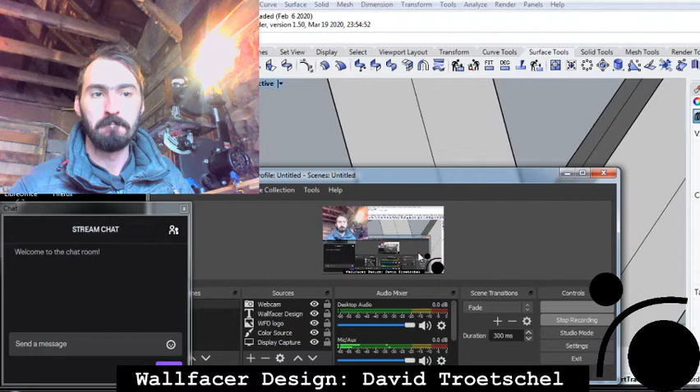Alright, well this is day two. This is the composite frame bike building project. My name is David Troetschel with Wallfacer Design. We're going to start calling this Wallfacer Bikes, something along that line.

Today's going to be a little bit weird for weather reasons. It's really cold here, so I'm working in the shop, but I might not be able to stand it for that long, to be honest. The idea today is to do the rear half of the frame. Yesterday we finished essentially all of this region, minus the head tube, which we'll buy, and we also finished the seat section as well.

What we need to do today is these back rear triangles. They're a little more complicated because they have angles built into them, but we already have these long sections cut. Those were done yesterday, so if you missed that video, they're up on YouTube and also on the Hackaday page. It should be fairly straightforward, but the junctions where this meets with the seat tube and the rest of the frame will get a little complicated.

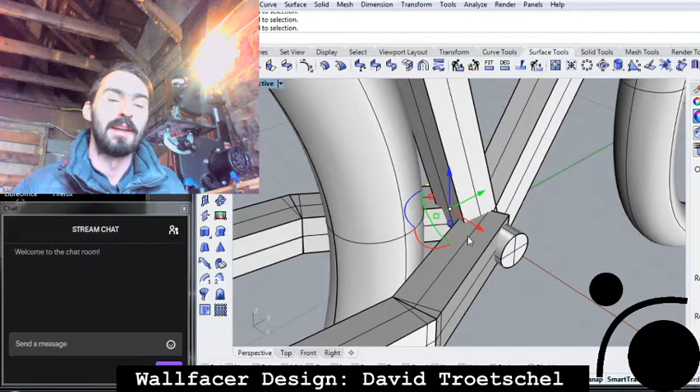Good thing is we don't really need to worry about this bottom bracket too - it's just kind of there as a simulation right now. That's probably going to be up a little bit, or we're probably going to be building something in this region. I also have questions about where the sprocket's going to go and whether we should be doing a drop chainstay for this side - I've seen that as a common thing. So we have some flexibility here.

I made some notes in the Hackaday page about it, but right now this is all based in the inch system, which is not a good idea in almost any case. It's very imprecise, and they just don't make that many rulers that work in tenths or decimal divisions of inches. So 10.1 inches is pretty hard to do through a fractional system - you need a specialized ruler for that. Either way, there are some serious errors in the frame already that I noticed, and it's because I was using inches for the system.

Part of that was because of the boundaries I built in. There are certain angles that only make sense for bicycles that you can't really go in or out of. Things like the stack and reach limits are never going to be below a certain number, and never above a certain number for any typical frame set. So those constraints have already been built into the system, but to convert all that to metric, I have to change those upper and lower boundary limits. That's going to happen, but probably tomorrow, maybe this afternoon, depending on how I feel.

Since we're already about halfway done with the primary build of this frame, and we've learned a lot already, I'm just going to keep going, build this back, and then we're going to glue it together and see what it looks like, hopefully. That might be all done today, but probably with gluing it together, those photos will be uploaded later.

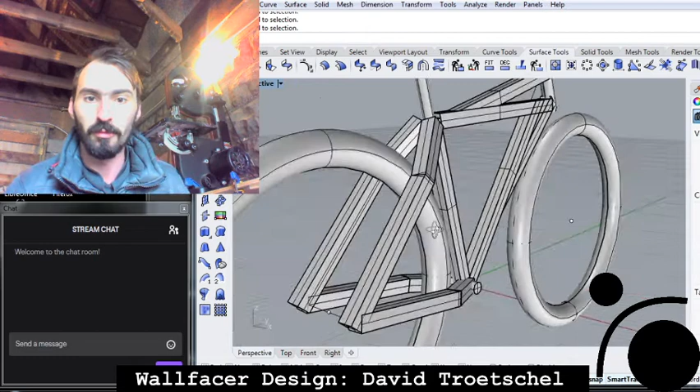So we'll just grab one of these members first. It's going to be a very similar process to yesterday, if people were there for that, or if they catch up later.

Let's see how we want to do this. We're going to measure from essentially this point to the end, and then we'll find the difference in that cut value. It looks like once we make that cut, we'll be able to flip the member and it'll transform into exactly the correct angle we want. But we'll double check the dimension when we get there. This should be really simple and straightforward, actually. So let's do it.

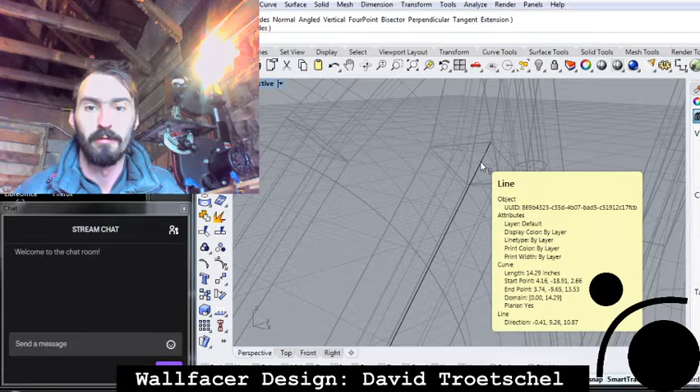We'll go with standard line, pull it to the end, and then we want to make sure we connect to the right place. We'll use a bubble to measure this - it's 14.29 inches. So I have the member stored back over here.

And that piece is still labeled from yesterday, so it's the top right triangle. Let's double check the dimension again. It was 14.29. Ruler.

Since the other side is going to be a mirror, once we get to that point, I'll just trace from this template and cut the other one as well. Like I said, this should go pretty quick.

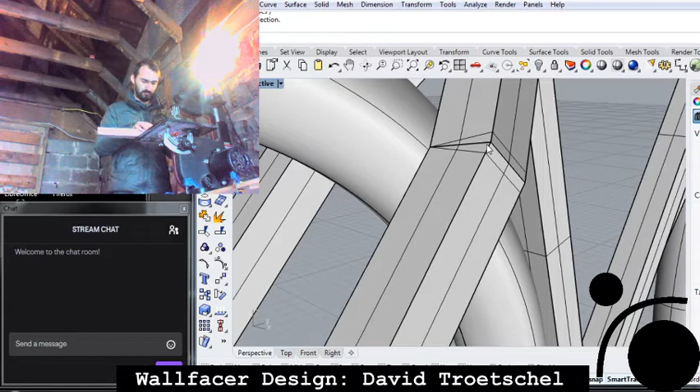So if you can see this, we went from this cut, and now we have a transformation here, which we'll measure and it should match up. So that's our nice convenient little bend right there. Let's figure out what that dimension is supposed to be for the longest edge, and then we'll double check.

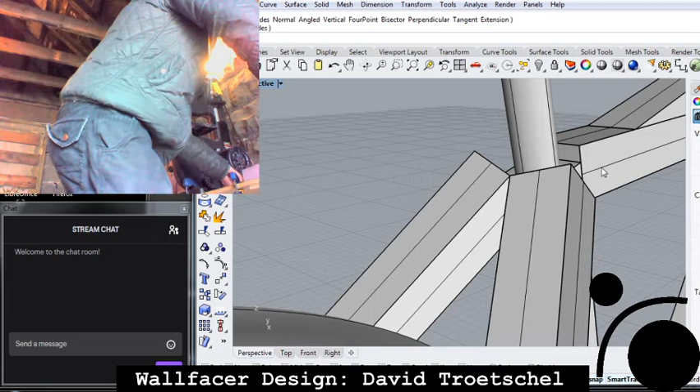Start of line. Alright, so that line is supposed to be 6.67 inches. Which it is not.

And it's probably because I cut the wrong member. Haha! So what we'll do is we'll cheat. Well, let's trace it. Yeah, so I actually cut the wrong member, so that's a little bit annoying, but hey, you can make mistakes once in a while.

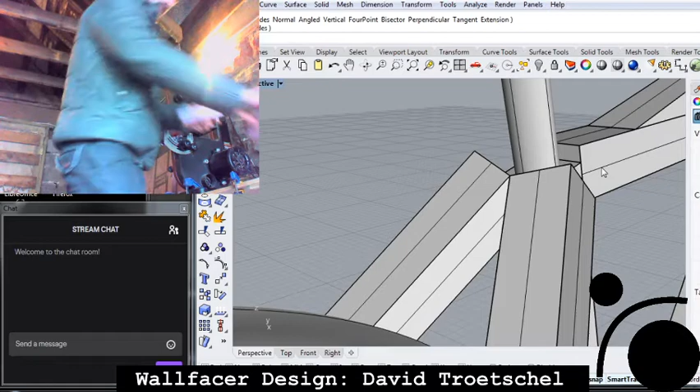So we'll just trace that dimension here. I'm pretty sure I thought it was supposed to be 6.67. So here's 6. That's actually still short, so it must be measuring from the center point, so it's not actually the outer dimension.

So that's interesting, but the way we can get around that is by actually tracing something like this. So I'll just take this to 6, and then say 67 -- now I'm actually using hundredths. Found all my rulers for that.

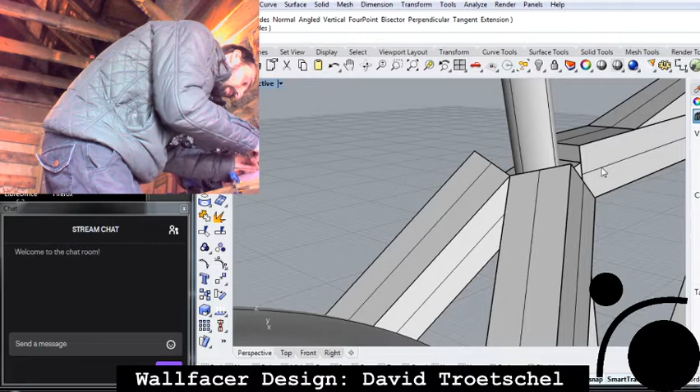And it looks like I'll be able to use the same piece of scrap for another piece as well. Or actually, what I think I'll do is, because I already have these two pieces cut, I'll start lopping it off of either a scrap piece, which I don't think I have anything long enough -- almost there -- or I'm just going to cut it off of the other scrap piece that was supposed to be the other top. Let's see. At least one longer piece that I could use, but I'm just going to start cutting this part.

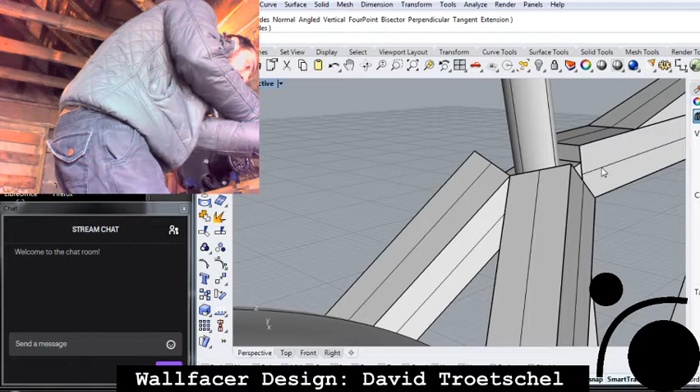We'll do 6. 7. Oh, that's actually backwards. Yeah, it should be like this. I'll measure. Six.

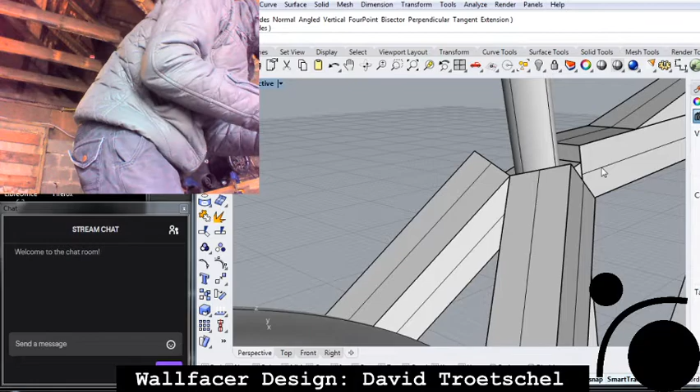Definitely a learning curve to this. But I can see how once the first couple frames are done and we have a working model, this is gonna go pretty quick. Because it's just gonna be a matter of copying these dimensions down and cutting where it's appropriate.

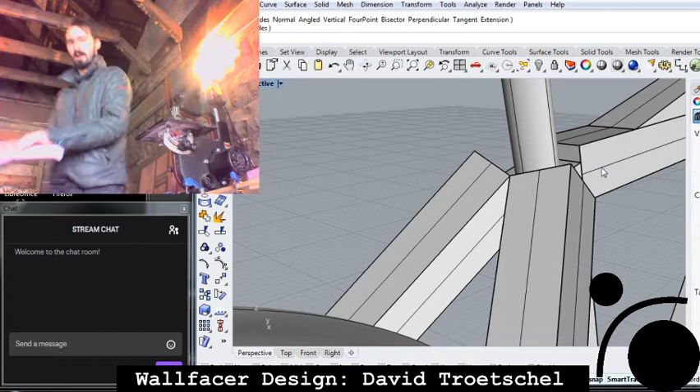Alright. So I'm going to lay these down on the ground and we'll be able to see essentially the top view. Give me one second here.

And at this point, I'm going to measure between the axles as well, so we can make sure. So this is actually the rear top of the triangle. I'm going to measure the axle width and then compare it to what I actually have dimensioned, just to make sure we're not messing something seriously up.

But so we just looked at effectively this view. It bows out slightly, but that's going to kind of correct itself, I think, as we start to cut the other components and then join it together. Just because of that joint.

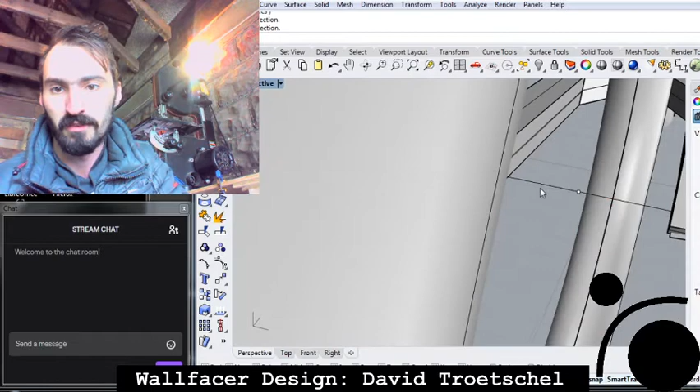So this curve here, how wide is that? That is 5.32 inches. We'll measure between. And that is close enough. Yeah, that's actually very close, which is extremely encouraging.

So I'm going to take a bite of my burrito, and I'm going to grab the other pieces to start cutting these.

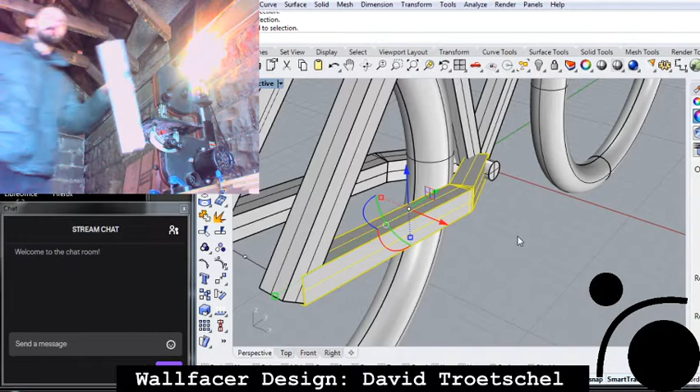So, 2 pieces. Let me see if my camera's messed up. No, it looks fine.

So for this one, let's grab one of these edges. Again, I'm expecting this to get messed up because of that weird tangent line length. So what I really need to do is find some way to measure the exterior length, and that's actually the true length of the member we're going to cut.

Also looks like I could have just added maybe an inch effectively, and that would add the extra travel distance, because it's really from there to there, from there to there, over.

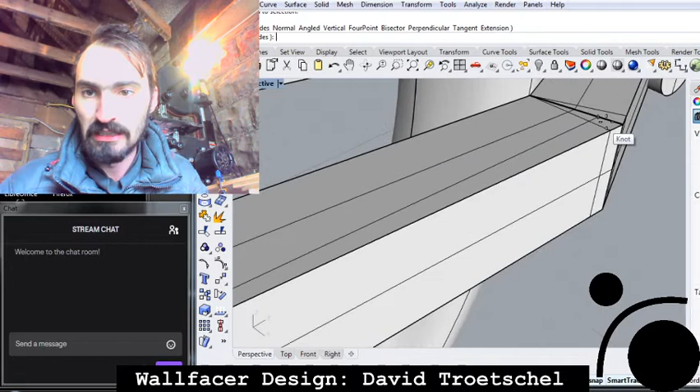Anyways, lessons learned. Let's see how long this is. So we'll go from here. That's 12.89, we'll just say 12.9. That's good enough.

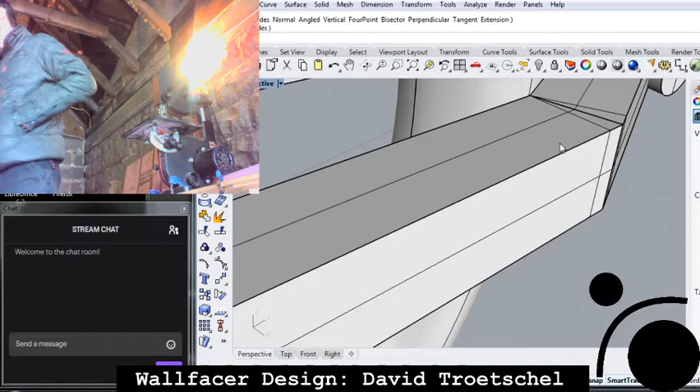Literally just misplaced my ruler. Where did I put it? Put it on somewhere. Just had it. I'm going crazy. Well, they'll probably turn up in a second or two.

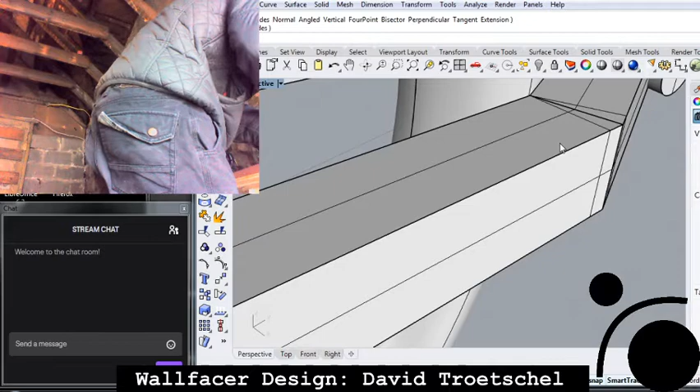When it's getting backed out a quarter.

So a pretty shallow angle, really. But once you add it up together, it's bigger.

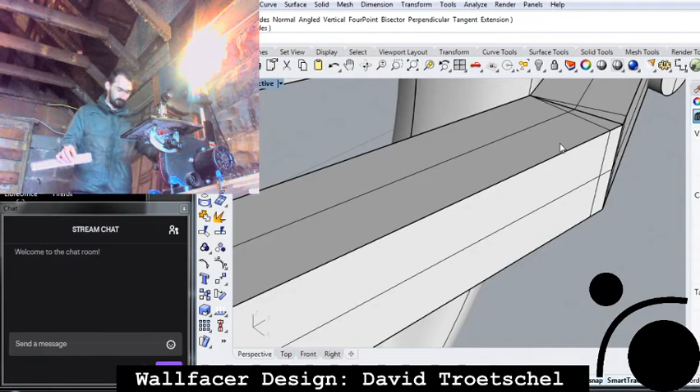Grab these scraps. Hopefully one will work.

And then the next piece is going to go from here to here. How long is that? 6.26.

Oh, too short. How about this? That's long enough. And I'm just going to call it 6 1/4.

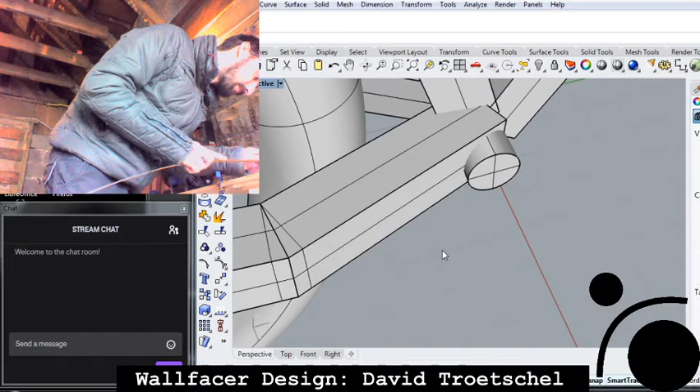Measure down. Do the angle. And then cut.

Another piece that'll work.

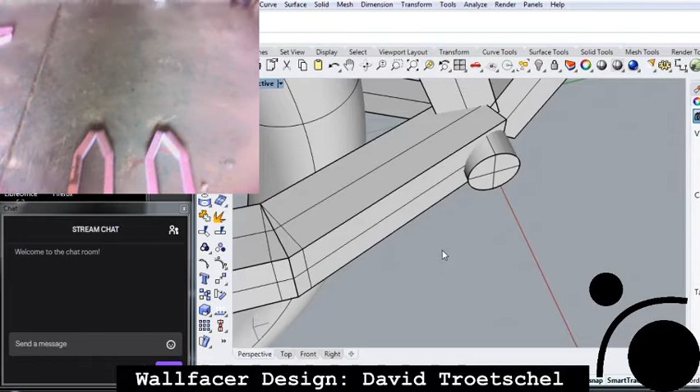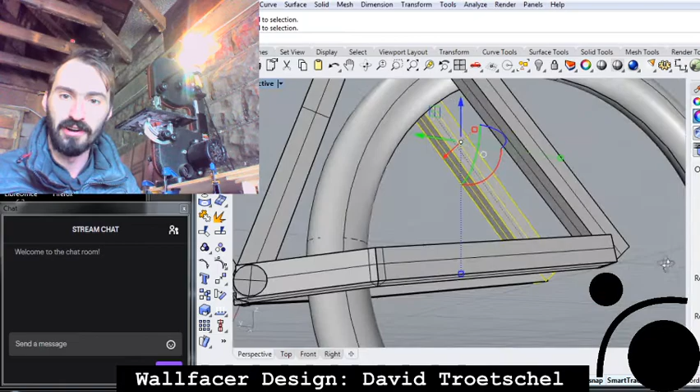So really it looks like what we should do—this is slightly off-centered in this rendering, and actually in the true model—but for the ease of just producing this initial frame, I'm just going to consider this cut like an actual blank cut all the way through, so with no overhang on the interior as would actually happen.

So we'll do a Boolean split, and then I'm going to pull out the angles, and we're just going to cut it from there, and we'll call it a day, because figuring out this joint is going to be way more challenging.

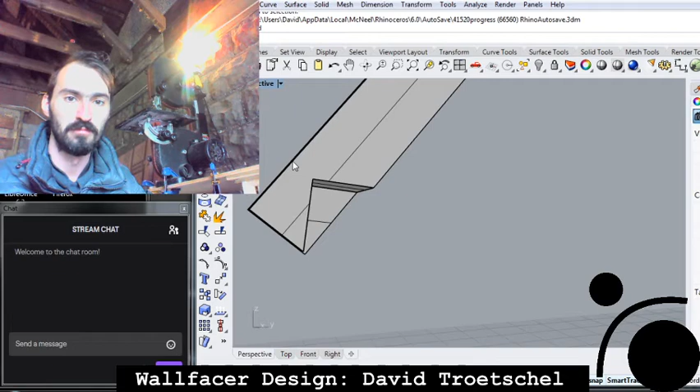So what this is telling me is from that top edge, I'm going to measure down, then a certain distance, draw that point, measure over, down. Yeah, that's how I'm going to do it.

So we'll do a couple lines here. We'll go, that. We're going to do another line that's going to be perpendicular to that. And then we're going to do another line that's perpendicular to here and measure over that distance. That should be able to give us all the information we need to cut this.

We're going to delete this for a minute and start examining. So it's going to be 1.26 down. So first of all, I got to grab my top piece.

In the correct orientation. And measure down 1.26.

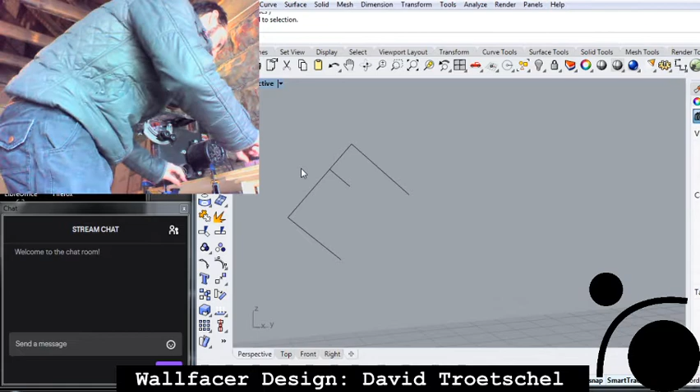Next dimension is going to be 1.18 over, and that's going to be 0.64.

And then we're going to measure down half, and all the way respectively.

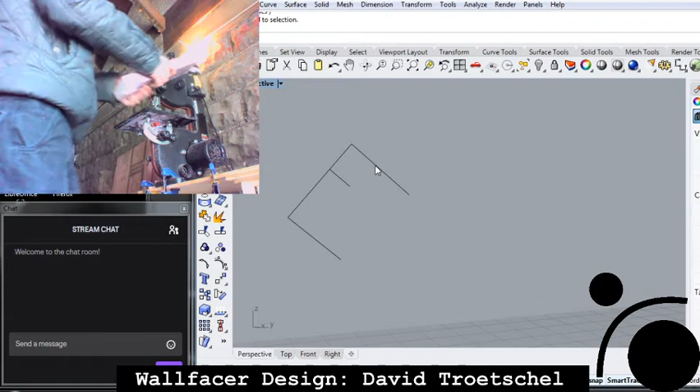So I'm just going to trace. Very precise, I know.

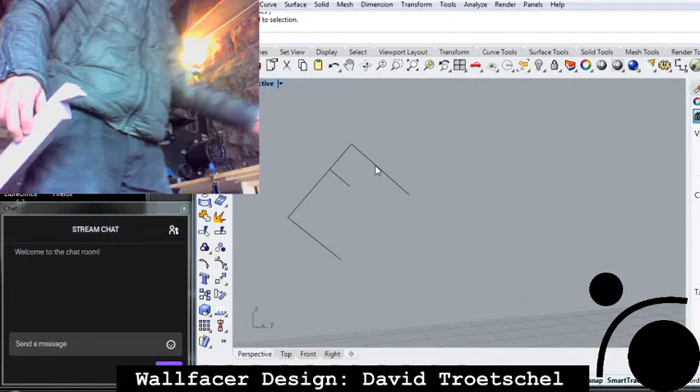And so, for 30 minutes, we've built the entire rear triangle. So what that means is so far, this frame—to actually cut all the primary members—has only taken 2.5 hours. This is the first time. That's pretty encouraging in my mind that this process can become more precise and faster over time to create ultimately a really awesome result.

So I'm just gonna line these suckers up so that we have an idea of what they look like, in a split second here.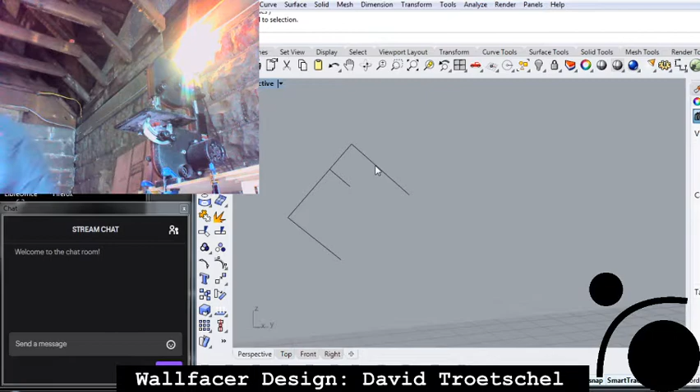Well, I at least got one of them to stand up, which is actually kind of a miracle. But there you go. That's what that angle was.

So that's that joint, and that allows us to start building that rear triangle. We just need to do a couple more cutouts. These ones are probably a little more complex. Maybe I'll have to cut these by hand, or with a chisel or something, or the razor blade. But yeah, I guess we'll start pulling it apart and figure that out. First things first, though, let's get this down.

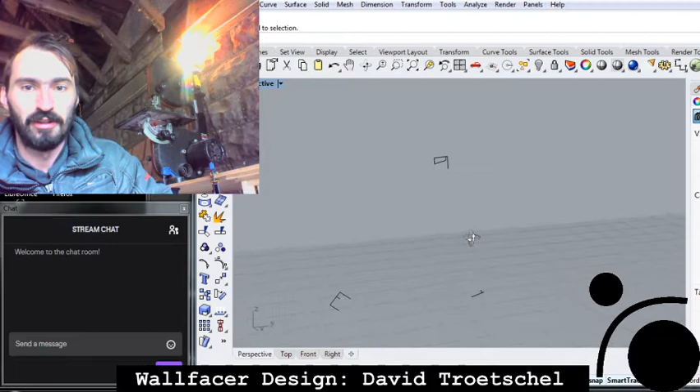So you can kind of see where all these floating angles that I've been measuring are in space.

Since we've already started on that top piece, I'm thinking we should just keep going. So I think we're going to split this with this. And then again, we'll move this up 50. Because I shouldn't even have moved it down. So this one's going to be a little more complicated. Sorry for my weird navigation skills here.

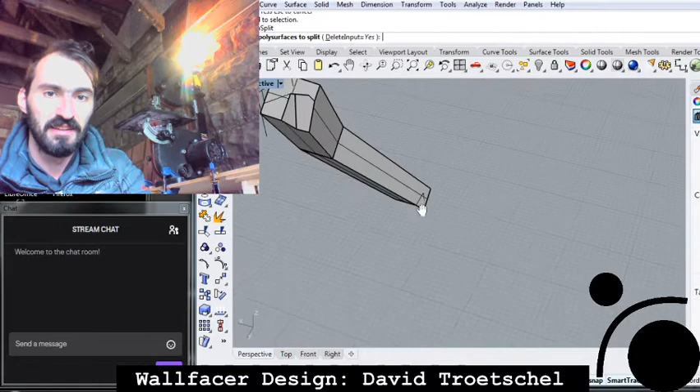So the good thing with this is that really this top section here does not need to exist. Although I guess it does. Yeah, it just blind ends. So let's see here, how do we do this?

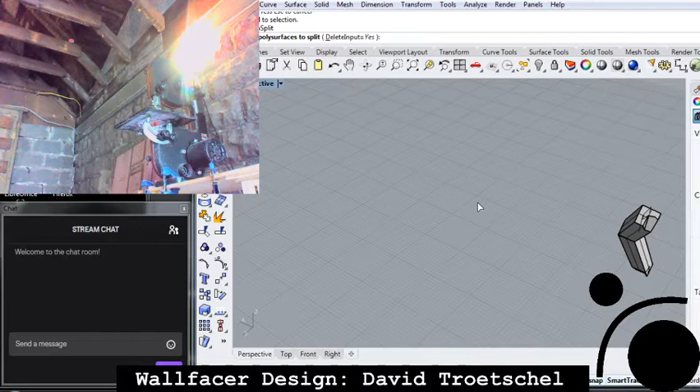How do I want to cut this? Really tricky. This is going to be even more annoying to actually kind of duplicate.

Yeah, it's really just because it's at this bizarre angle.

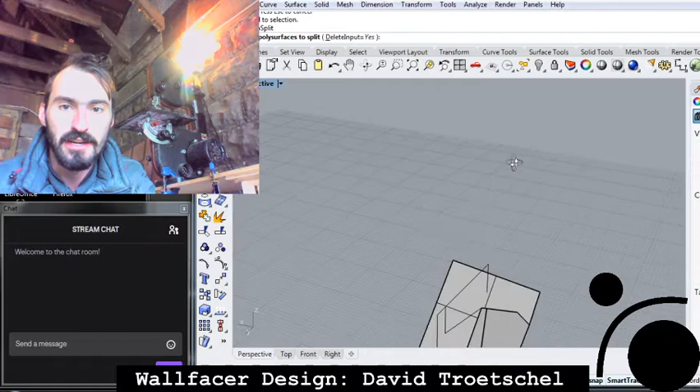This looks like it rendered so strangely. But really it looks like there's a little corner here that doesn't need to exist. It's showing up in the illustrations and stuff like that. Yeah, we're just going to ignore that and we're going to cut right on through it.

Call that done. So really what we're going to do is we're going to be measuring a couple members here. So we'll go from here to, I guess we'll measure out.

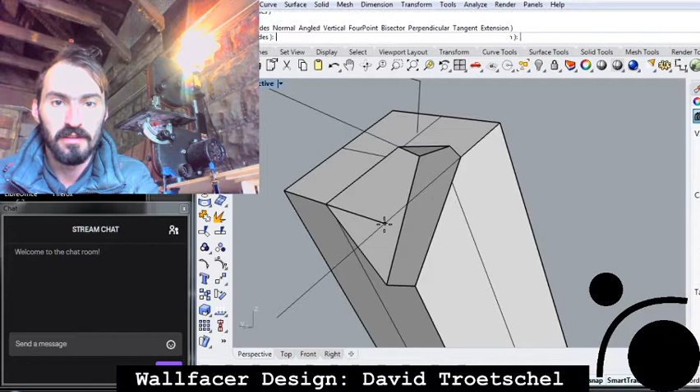Okay, yeah, that makes sense. So we really only need to measure, we should measure into there as well. Okay, so we need to do a couple more lines as well. So we'll come perpendicular.

Get rid of that, and that should give us these line lengths. Okay, so I gotta think about this, but looks like we're gonna go, let's come in.

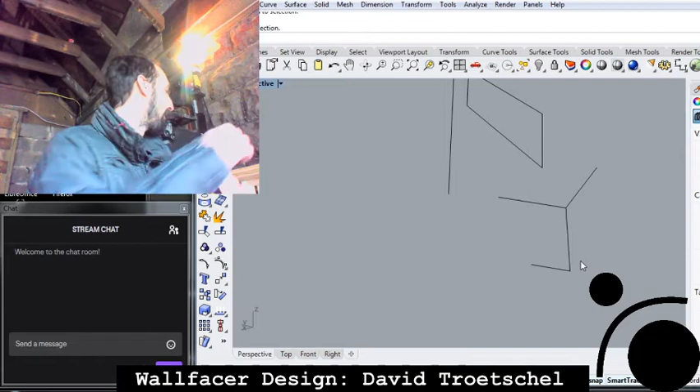So, first off, what's this distance? That's 0.8. And that's 0.93.

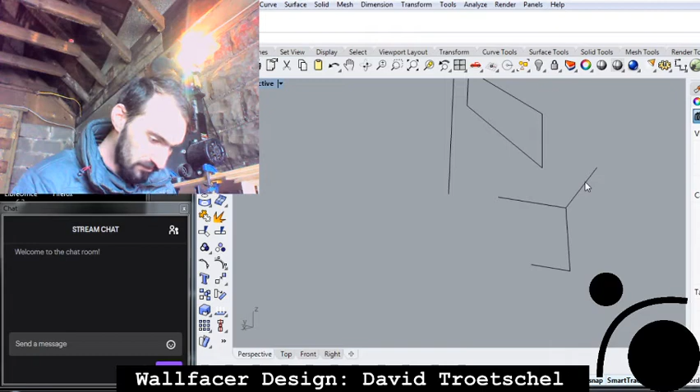This section is 0.68. With an extension of 0.1.

This is where it gets a little funky, I guess. And then go in 0.84.

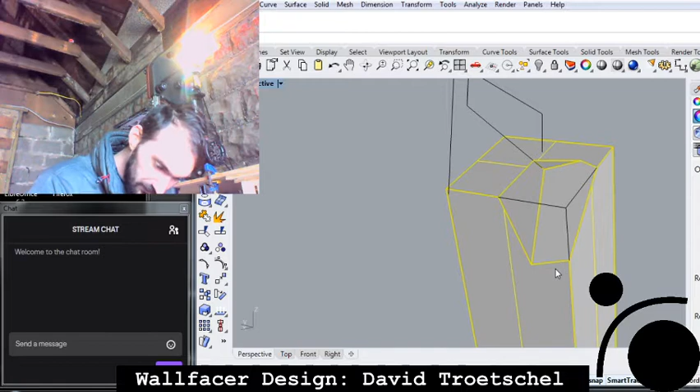Yeah, so this is going to be kind of weird because I'm going to cut an angle. Yeah, I'm going to do this by hand actually, because I'm basically going down to a certain depth and then cutting over.

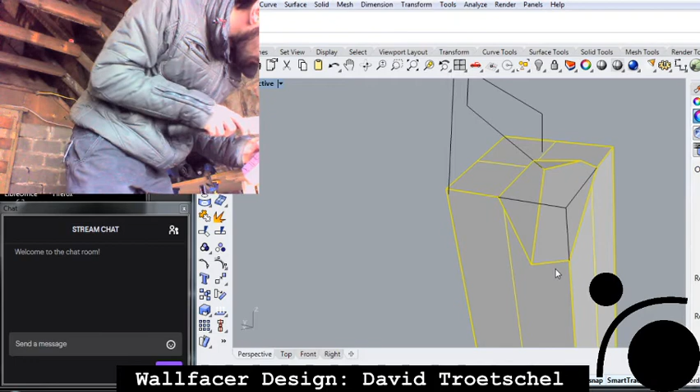Okay, so that's our little corner cut there. It seems straight, but it's actually not. It's actually angled very, very subtly. So the goal now is going to be to reproduce that on the opposite side, mirroring it.

Sorry I'm not talking as much today, I guess. Just busy working.

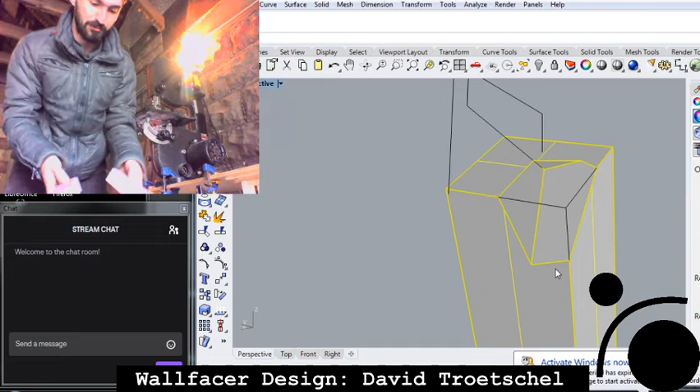Well, we got a mirror. So now I got two of these guys.

Okay, yeah, this makes sense how this is going to work. I'm kind of curious if there's going to be like a small gap or something, but it doesn't seem like there is. All right.

Yeah, it's only interfering with that one member. We already cut that out.

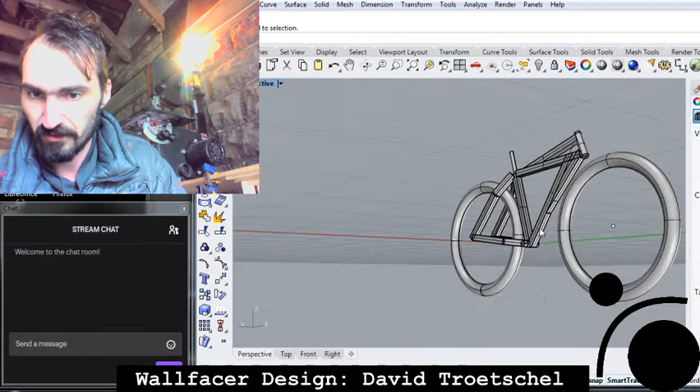Alright, so for these bottom sections, we're going to ignore this. Actually, we're just going to select these two, go 50.

It seems like there's a little piece here where that tang is. But really, it's that interference in the seat post. So I think what I'm going to do is just cut that seat post and leave these chainstay guys alone.

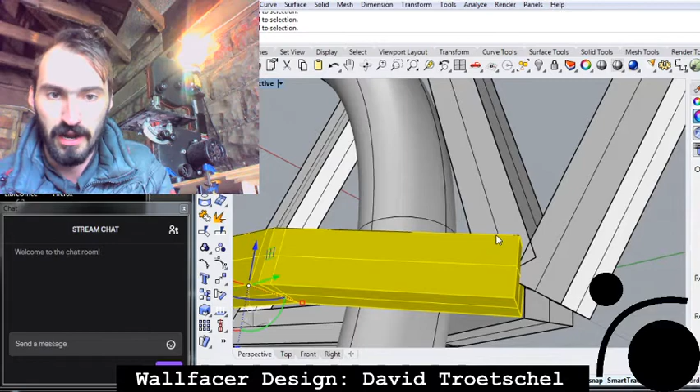So we'll go Boolean split. We'll split this with that. And then we're going to shift this up 50 so we can have a good look at what the heck we're making here. Because I don't think it's going to be beautiful.

And I guess there's another thing worth noting is that we are going to be putting a bottom bracket in here. So we might as well just assume that we're going to be cutting through that.

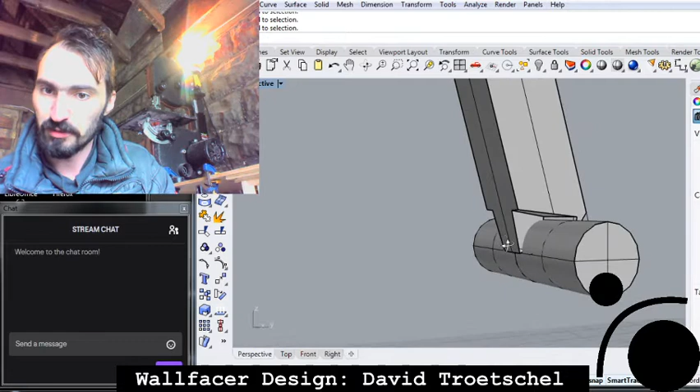Makes me think I should just, I guess we should just do this incrementally. Because really I should drill a hole through it for the alignment.

Let's throw these down, -50 again. That's a decision made. This is a little bit more complicated shape than it really needs to be. And we could certainly trim it so that it's not as ridiculous. But I'm cool with doing this. I think it'll be fine.

So I guess the easier way to do this would be actually to measure all the way this length down to that side, come over, then down to what we know is our edge here. Interesting.

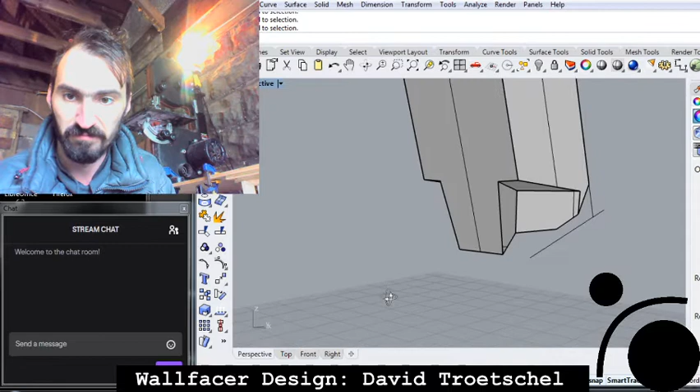What does this look like from the bottom? I mean, it's almost like a perfect little V-notch cut. So I guess the easier way would be, we come in and then slice. Interesting.

Yeah, this is going to be tricky. I kind of want to just lop off that interior triangle and fill that in later or something like that. So basically just have an angle cut again.

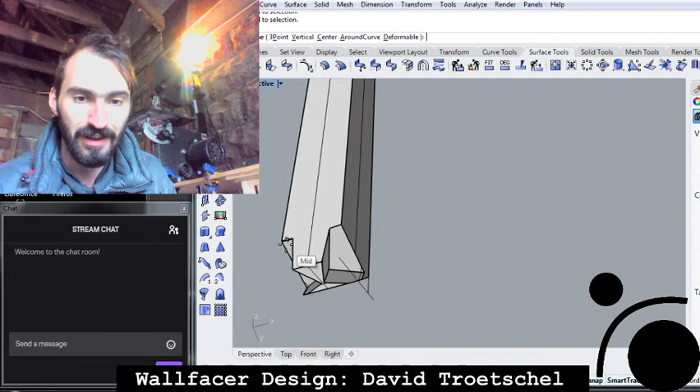Yeah, and then we could just cut out that section, perhaps. But I think that really it's that interface point there that matters. So I think that I am going to just do that. You know, I know it's kind of like a cheating method or something like that. But, nah.

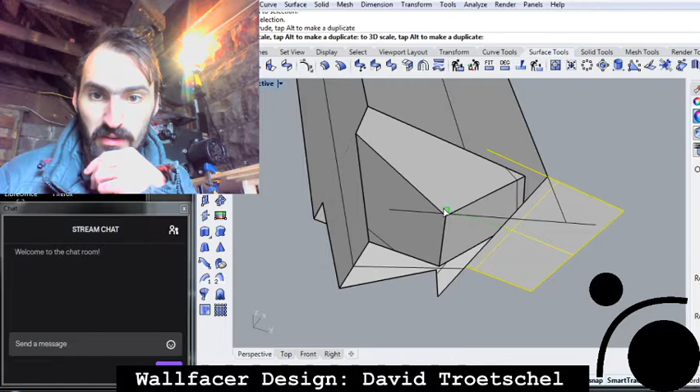So we'll just do it this way. Go pop, pop. Man, that's annoying. It's almost like it just doesn't want to match.

But really I only need to know that angle effectively, so I'll just do it that way. And I can measure over to the end. So let me go grab that piece.

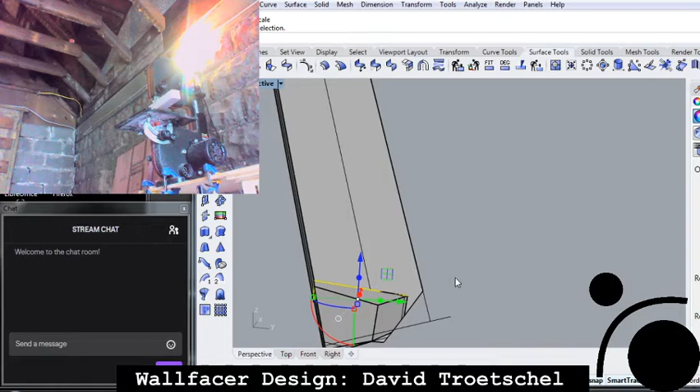Alright. I'm going to need to draw some lines. Looks like that snapped to the wrong point. So I'm just going to redo it. There we go. .37 inches.

There's actually a surprisingly small angle as well. It is so weird when you're looking at it on the screen because it looks a lot larger than it really is. But no, these are small little cuts, little nibbles here and there.

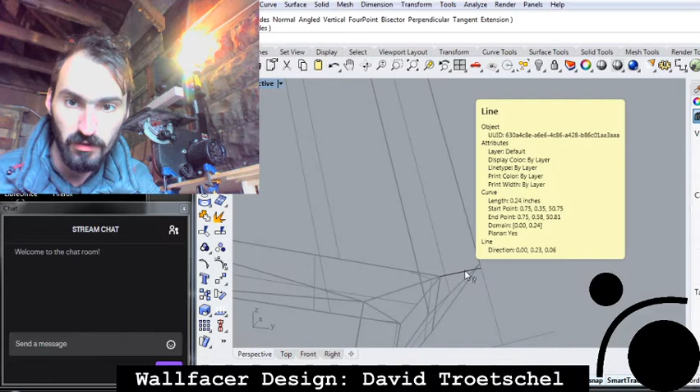And that intersection point is going to be over 0.24. So I guess I could just go ahead and do that notch cut. Yeah, and leave that center bit. We'll just make my life a lot easier.

Alright, so we're going to measure again that. Yeah. 17.86 and over 24. 17.86.

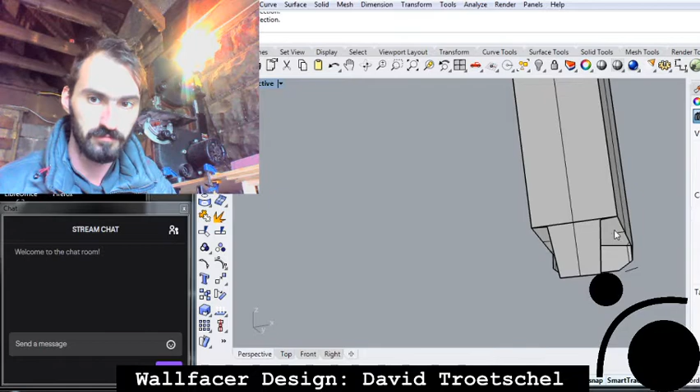So I guess I could measure the width here, and that would give me like an idea where that cross is going to be. Yeah, get those 2 points.

So we'll just go add a curve to there. That's like 0.46. All right.

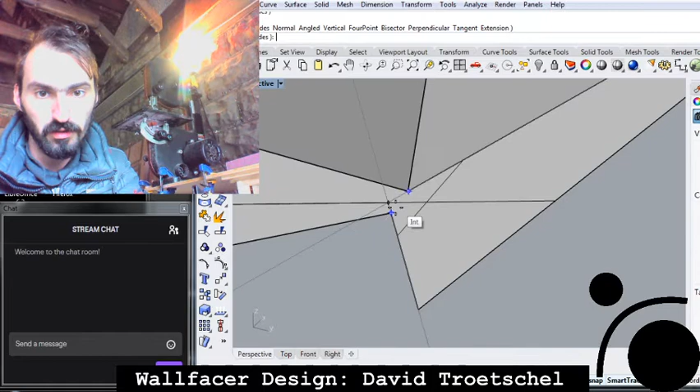Okay, so I can do it this way. So I can go from here to... So that curve... Okay, this is going to be interesting. So what we're going to do is go divide this in half.

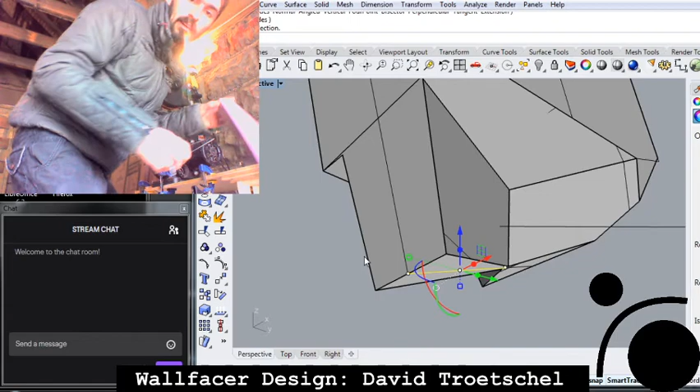5.5. Point. And said here. And then, what's that length again? 0.71.

Okay. Yeah, this piece is definitely the most complicated, just because I'm making it so.

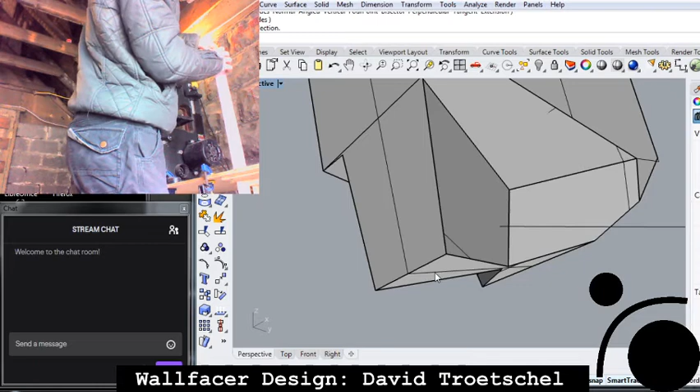Frustrating thing is probably the seat post is going to have to change at some point. Like, I think I'm going to have to get away from square tubing, or I'm really not completely sure. But it just doesn't seem like this makes a whole heck of a lot of sense. Yeah. Looks like I got some shapes now I can work with.

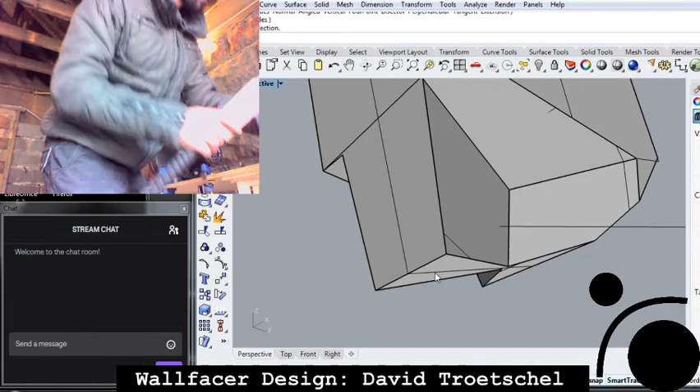Okay. Looks like that'll be close enough.

So that's like a crazy weird dovetail joint effectively. Was not expecting to be making that. But hey, it'll work.

What? Trying to just like loose fit this together. Looks like I'm gonna have to glue it for this to actually work.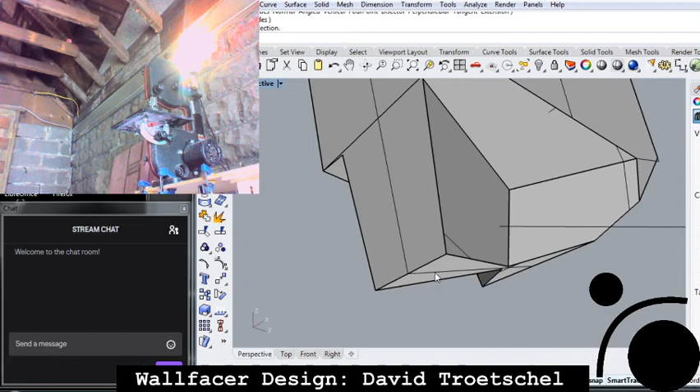But this has been a pretty weird work session. I definitely was expecting to work for like another hour still. And really, I guess I could be, but it's going to be like gluing and stuff like that. And I feel like this session has been way more boring than the last one. So I guess we'll see how this continues.